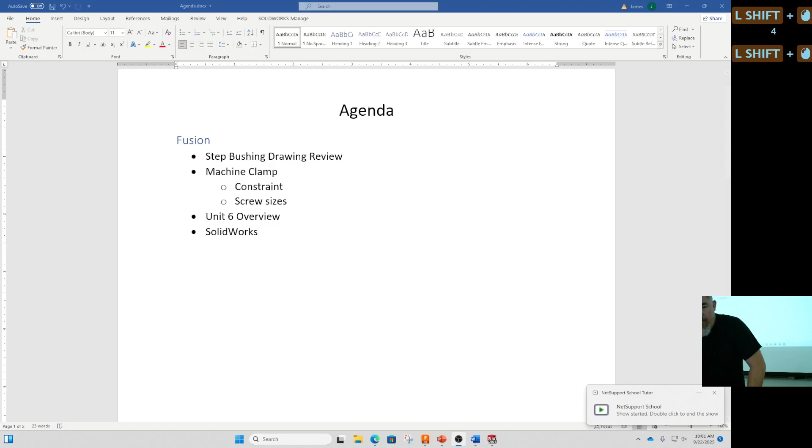Recording. All right. So here are the drawings that people did for the step bushings. And so when we're looking at these, there's two main kind of things we want to look at. One is the drawing views. What views did they use? How are they arranged? And that kind of thing.

And then also we want to look at dimensions, right? Which dimensions were picked, but also what other thing for dimensions? We want to pay attention to which ones we use, but also what? Not number constraint. Yeah, but where we put them, right? Do we pick the right dimensions? Do we put them on the right views?

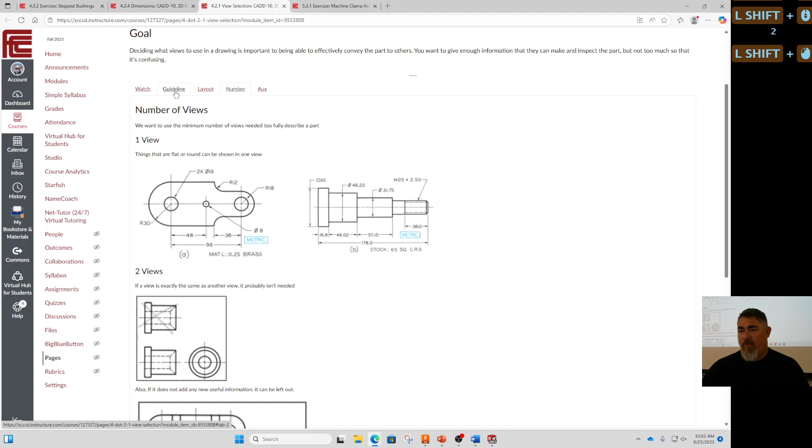And so just to do a quick review of that, here's the part that it gave us. And so in view selection, we've got some guidelines: the drawings themselves are for inspection of the part. We want to have as few views as possible. We want to see holes where they're round, and we want to use an appropriate scale, and we want clarity for the drawing. So we want some white space to kind of separate things so that way it's easy to see what things are, right?

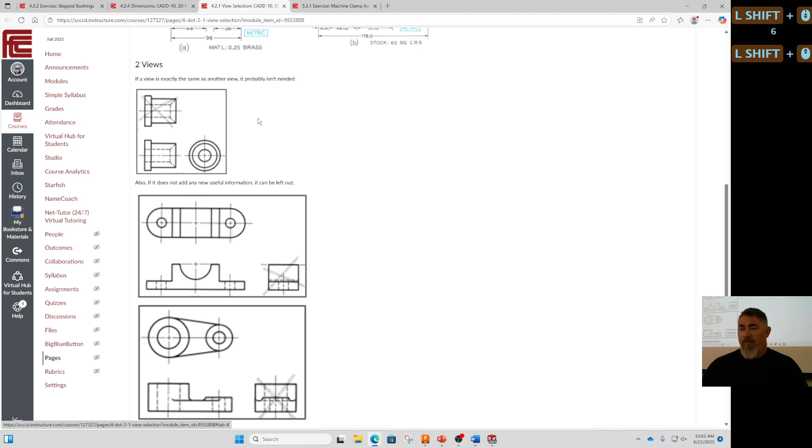So I'm not going to go through all this, but based on the number of views, for cylindrical things, if it's got a cylindrical thing with a hole in it, usually 2 views is good for that, right? And then, so let's just look at views first on these. What do you see? First, is all the geometry correct? No. Right, this one? That's not the shape of the part, right?

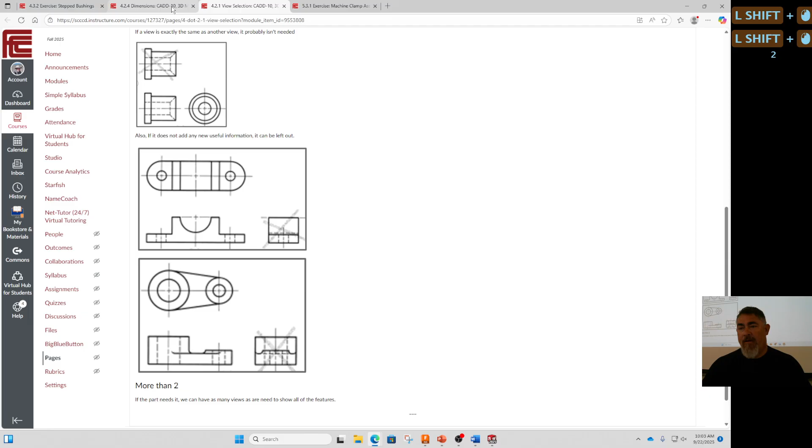And so that's one of the problems we encounter sometimes if we have a drawing that doesn't have dimensions correctly. Because if you don't look at the parts, you just look at that drawing, it looks like it's flat, right? What should it have on it to tell you that the part is round? Diameter symbols. That would tell you this thing is round. So even though we had pictures of the part down here, because they didn't have the diameter symbols, it's easy to overlook something like that. You might think, oh, that's obvious, but really, it means a lot, right?

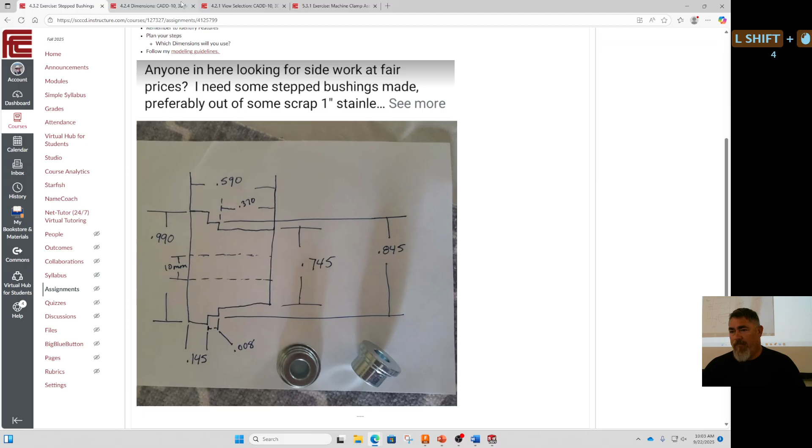So that's why we want to make sure that even when we have our drawing, we don't overlook doing simple things like that. So I'm going to take that one out of here. Even though this view is pretty good, we're just going to take that out. So what do you think about these other ones? What about paper size for this part? One is too crunched up.

So yeah, we have a few that did A size title blocks and some that did B size title blocks, right? Is there a big difference in the use of the paper on those? Because you have more clarity. Like, the more clarity, the more dimensions pop out. And so some of them, like this one, there's a lot of white space, but it's kind of crowded.

But let's say between this one and this one, this is a B size, that's an A size. The views themselves, now that I've scaled them down to the same size, they're about the same size and about the same use of the paper, right? So it doesn't matter which one we use at this point for this.

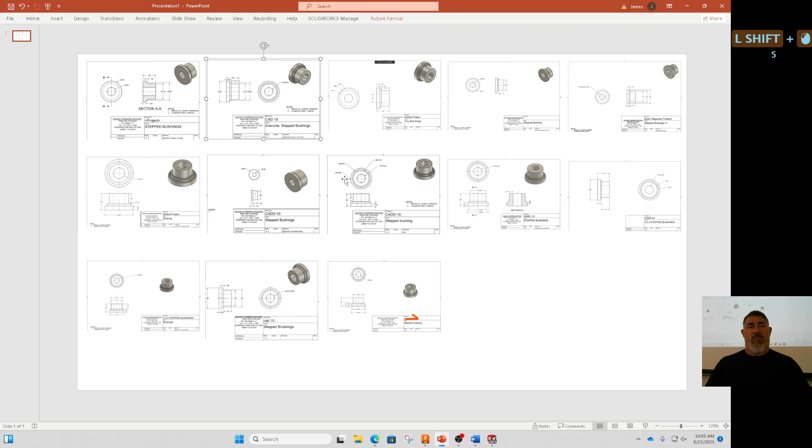So there's some A's that are a little bit more crowded, some that are a little less, and there's some B's that there's a lot more white space, and then some that the paper is kind of used differently. So is there a big difference on this part from an A to a B size? Not really. And so either one would be okay. Kind of depends on where you're working, what they like to do.

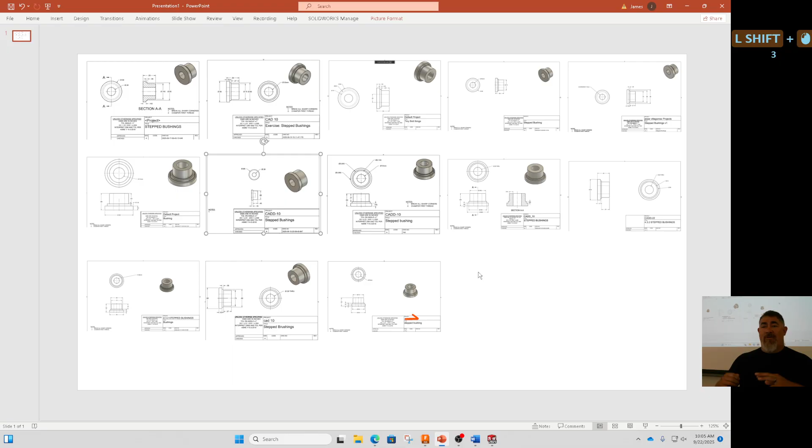Some places say, yeah, make it on the smallest piece of paper. Some places, no, we're only using B's, but we'll print them out on an A-size sheet so it's more portable, but it's still readable. So I just did that for the welding department on some drawings for them. What does change though when we're going from an A to a B size? What's a big difference on the sheet? What do you mean? Yeah, so the divisions are a little bit different.

But let's see, just look at these two. Right now I've kind of scaled them to the same size. What's a big difference between these two drawings? Just without the views, just what? Yeah, the size of the title block. On an A size, the title block takes up almost a third of the page, right? On a B size, it takes up a lot less proportionally.

Even though it's the same size when it's printed full size, proportionally it's smaller. So you have a little bit more real estate to work with for your views and things. And so that's kind of a thing to think about when you're picking paper size. So right now we're kind of going to leave that alone and look more at the content of the views. So got a few different layouts of views. Are there any that are laid out incorrectly?

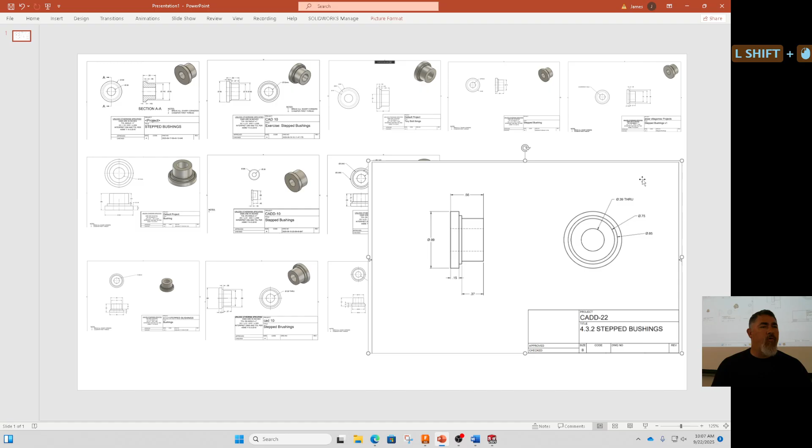This one? Oh, this one? Is that incorrect? So there's no isometric view. Is an isometric view a requirement? No, it's not. It's there for clarity, so it's usually a useful thing to have. Could this have been rearranged a little bit to add an isometric? Probably. That would help with clarity. But it's not wrong.

Oh, yeah, no title block information. We need those block tolerances. So, any other ones where the orientation or layout of the views is incorrect? Yeah, so this one right here, this is not the correct orientation for the views, right? If I came straight down from here, this would be turned 90 degrees.

And so we want to make sure that when we create that, we have our base view, we always project to get the other views. And we leave them on the side that they're projected onto. You don't make a new base view somewhere else on it. And this is also a problem that happens if you have one view and then you rotate the view, because it doesn't affect the other one.

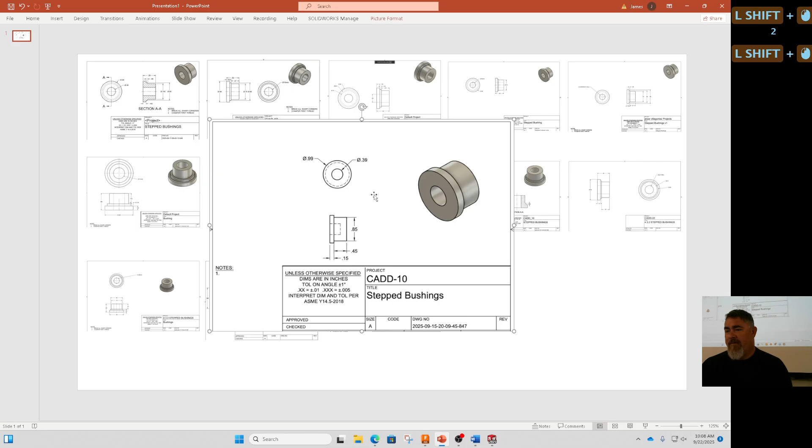And so that's why I changed the template this year to having just the base view. So we can fix that one how you want it and then create views from that. So we want to make sure that we keep things in the correct orientation when we're doing it. Any others that are incorrect? Upper left? This one?

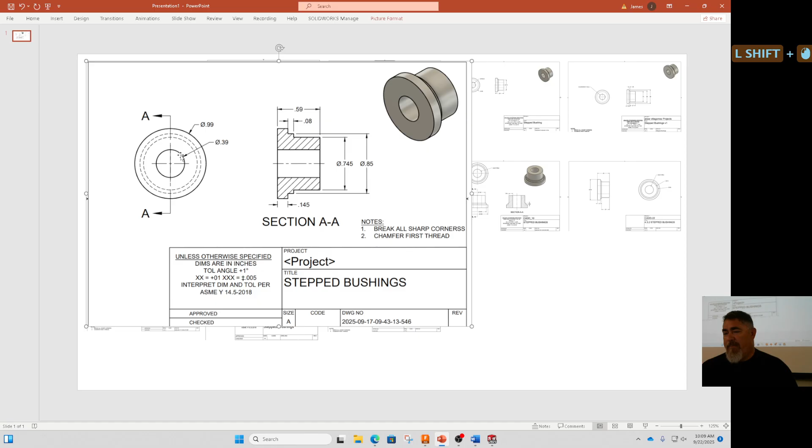No, because they've got it on the section, but the orientation is correct. Because looking at it from the side, those are hidden lines. So the orientation is correct. It'd be nicer if it was on the other side, right? It would be nicer if that view was on the other side, so there were visible lines instead. And so same thing with these here. It would have been nicer if the round view was on the other side. That would turn these two hidden lines into solid lines, right?

What? Yeah, they're all. So there's correct and there's more or less good, right? So all of these are laid out correctly, and so it's really a decision of what is better, what is more clear, what is more preferred. Which one's the question on? We're not going to ask that yet. So let's talk. Are there any that have extra views that we don't need?

Yeah, this one has basically the same views as this plus an extra one, right? Everything that's on this view could easily be on this view, right? And so that means this view isn't needed. So I'd probably take those, just like this one did, make this the section view.

But also, what about layout? So we have some that are laid out vertically and some that are laid out horizontally. Which ones fit the paper better? For this part, the horizontal layout fits better, right? If the part was real long and skinny, maybe having them vertically would be better. They'd use the paper a little bit better, and they wouldn't be kind of crammed into the corner of the title block, or having to reduce the size to make them fit. And so it's always a thing of which views are going to fit better.

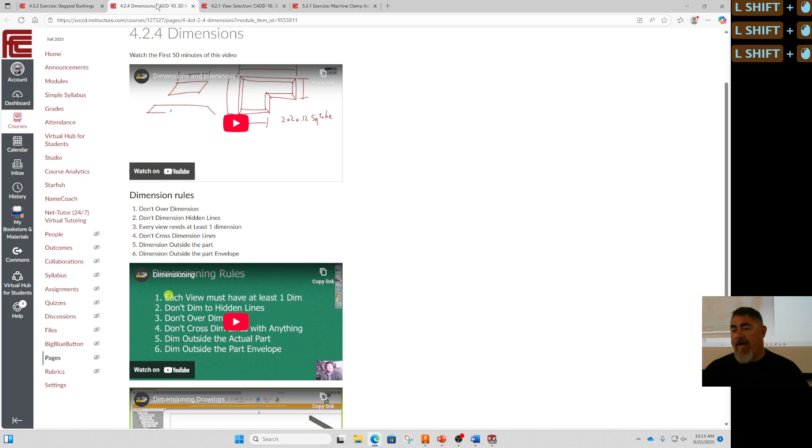So as a refresher, let's look at the dimensioning rules. So remember, I have my 6 dimensioning rules. Can you break any of these? Yeah, you can break the bottom 2. That's it. Those are the only 2 you're allowed to break. What's the part envelope? Yeah, if you just make it into a rectangle, that's the envelope.

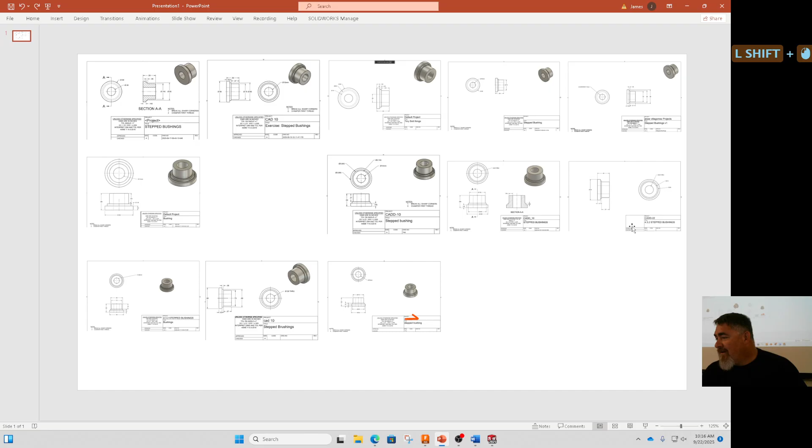And so let's go to these. So are there any that are dimensioned in the envelope? It's getting kind of close, isn't it? That's in the envelope. The 370. It's lined up with the edge of the part. Any other ones? No, everything else looks... Oh, this one. Right here. As well as this one. These are both in the envelope.

And you see that because it's there, it's looking smashed together, right? And that's why we want to stay outside the envelope. We want to keep things away from each other so they're not crossing over each other. Is this one breaking any other rules?

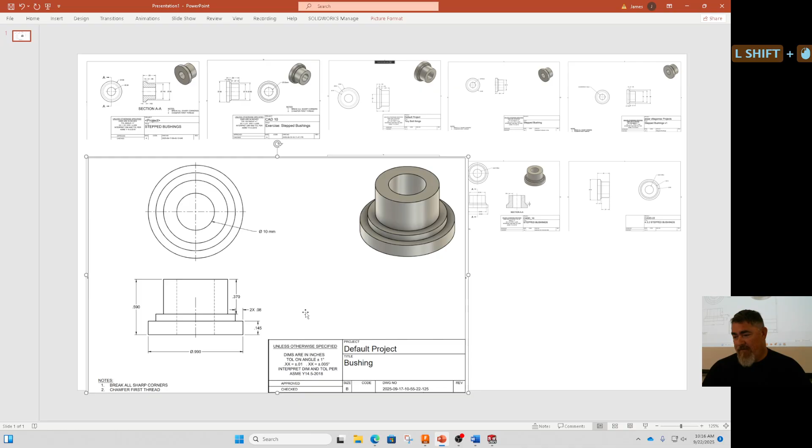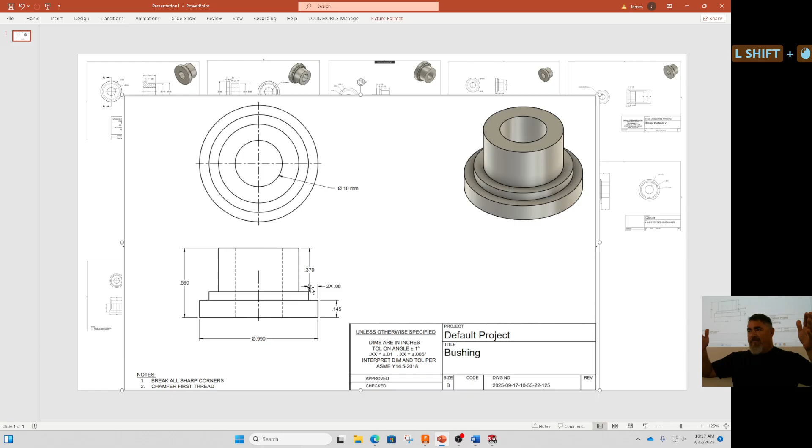Yeah, so it's crossing a dimension line, right? Don't cross dimension lines. If I look right here, the dimension line for this goes right here, right? And this one is going right through that. So even though there's no actual line there, it's going through where the line would be, right? And so that's breaking that rule. Okay? So the rules are there to make sure things are spaced out and it's easier to see what's going on.

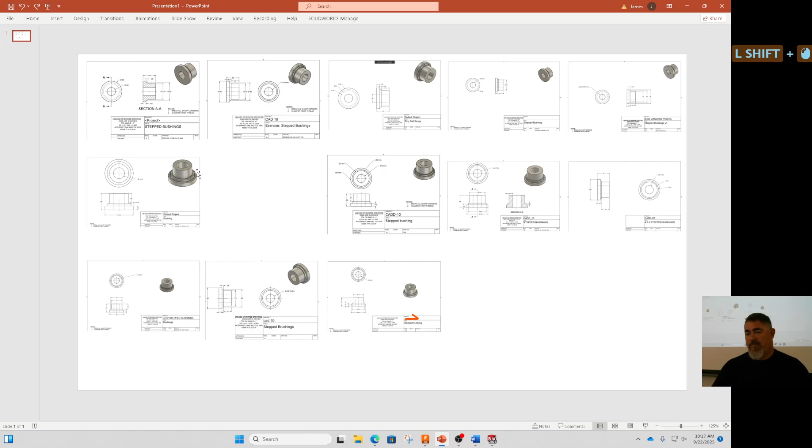What about the circles? Let's talk about the circles. Where should the cylinders be dimensioned? Yeah, on the side view. So where they're seen rectangular, right? So on this view where we see it rectangular, we want those dimensions to be there. The holes get dimensioned where they're round. Anything wrong with these? No diameter symbols. Anything else?

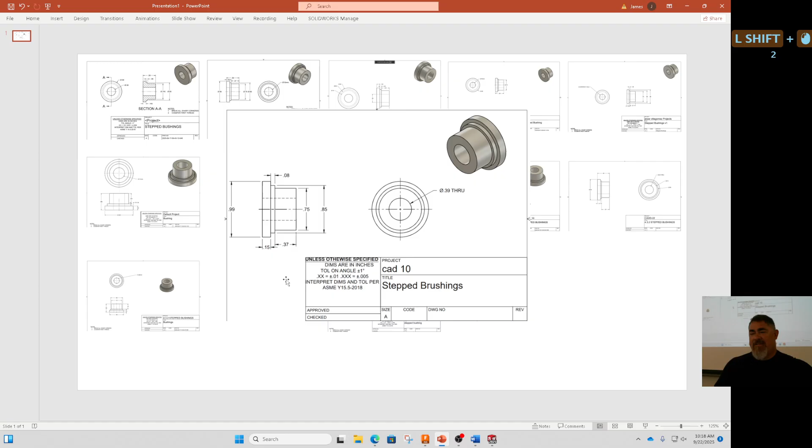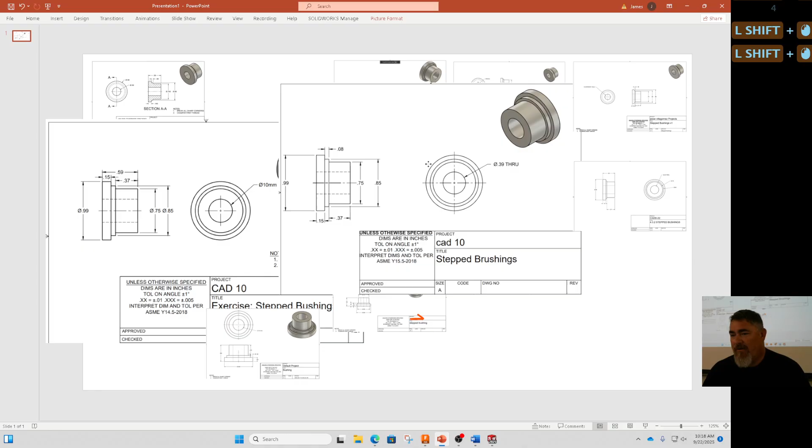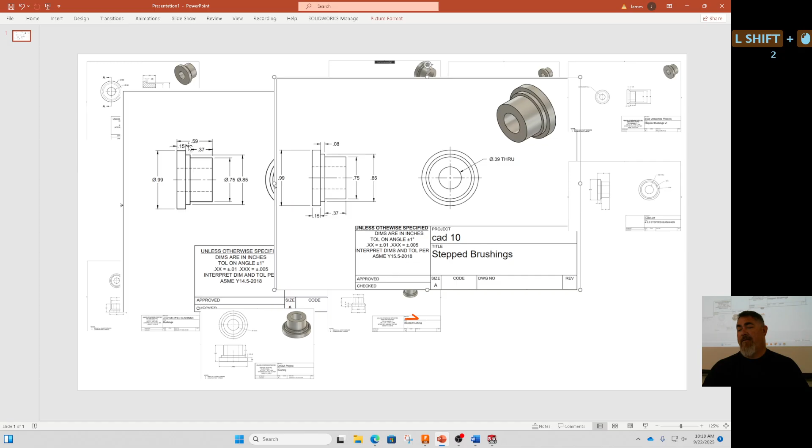They're kind of even spacing, right? This way looks pretty good, mostly, except for this top piece, where it's just running into each other. But up here, it's kind of smashed again, right? Same thing down here, it's kind of smashed. So we want to be able to have some equal spacing and space things out from each other. Which one looks the best with spacing?

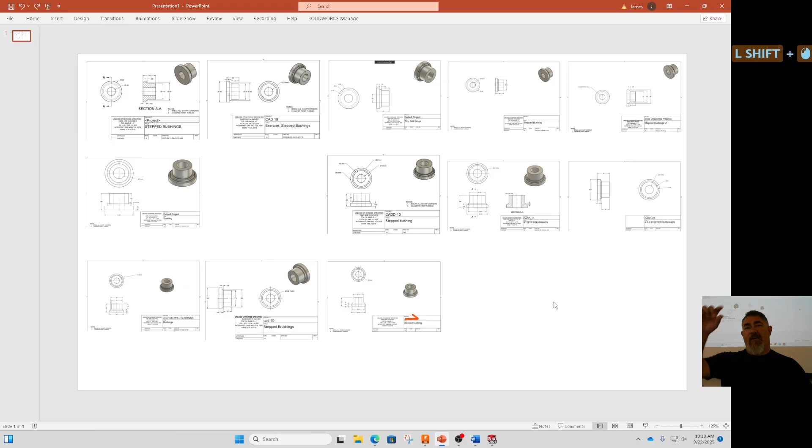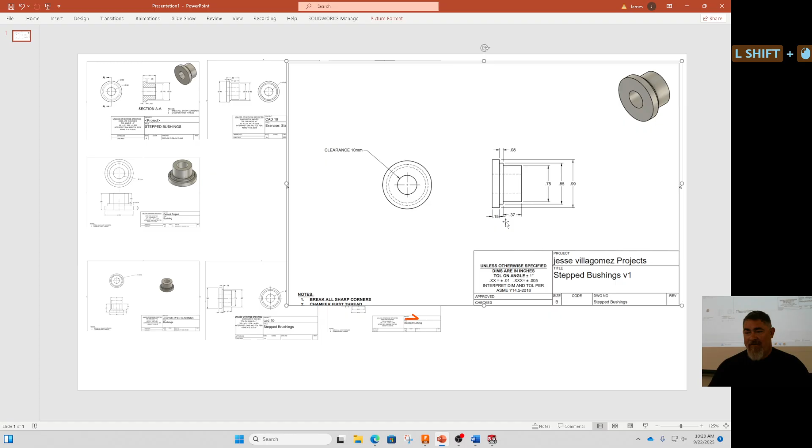I know you can't read the dimensions, but look at where the lines are. I made it small on purpose. Top right. This one? Look at that. What about that? So there's some good spacing here. Of course, I'm missing diameter symbols still. But here we're still smashed together down here, right? And that happened a lot; I think everybody just kind of smashed things together. You've got all this space and just smash them in there.

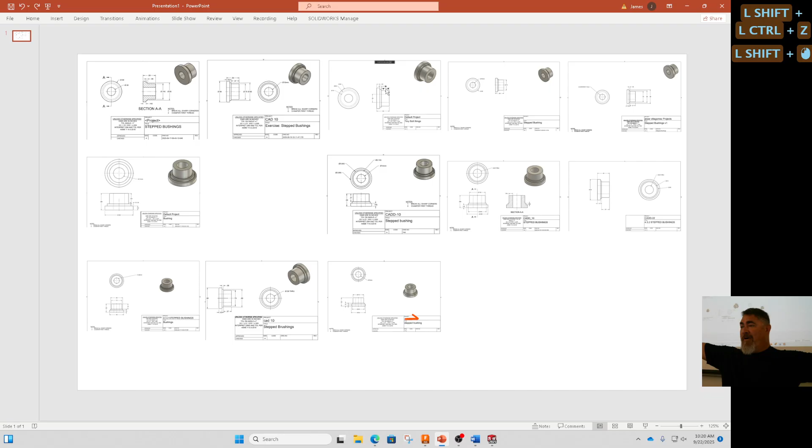No, because we want to be outside the part envelope. So, like this one really kind of brings it up a little bit here. But this one should be where? On the right side over here. Same thing. If we look at this space and the space to the first dimension, it should be the same or about the same. So we should go out from the part about the same distance to get to that first dimension on all sides. And then keep that spacing.

What is that space supposed to be? From the part to the first dimension. It's 3/8 to 1/2 inch after it's printed. And between dimensions should be about 3/8 to 1/2 inch. Is there anything in Fusion to help you know where that is? Aren't there little snaps that happen when you're dragging your dimensions? Yeah.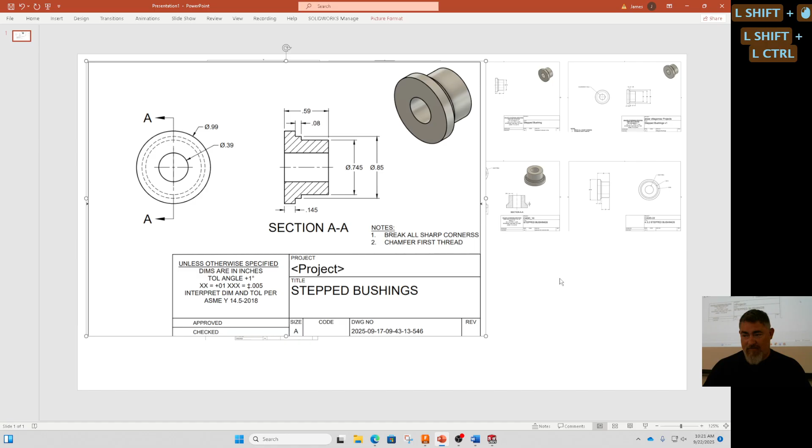So like here, it snapped to 3/8 from that point. But if you bring it out a little bit more, there'll be another snap here. So set to your first snap and then stay on the snaps after that, and that'll keep things even. And I'm not measuring them, so as long as it looks good, that's what matters. In AutoCAD, yeah, we can make it exactly a certain distance away. Or draw by hand, we can make it exactly. In the solid modeling programs, Fusion, Inventor, SolidWorks, we can't tell it to be exactly a thing. We can go by the snaps, though, so that way it stays even.

And so that's something to think about. On this one, though, somebody put their name under the project instead of the name field. So make sure you guys do that part correctly. What about any other thoughts on dimensions? Anyone that broke any of my dimensioning rules? So anyone break any of these rules? Are there any views that don't have any dimensions? No? That's good. Anyone dimension hidden lines?

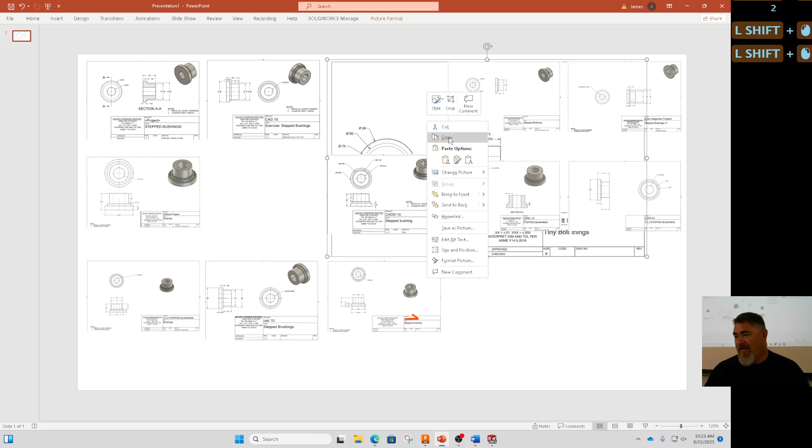Yep, right here, right? And over dimensioned, because they put the dimension there. Oh no, they didn't do it there. So actually, this one's not over dimensioned. Just these ones should be over there, but they dimensioned the hidden line. Any other ones? I thought there was another one. Anyone over dimension? Oh, here. Remember, out of those 4 dimensions, we only need 3. So, which 3 should you use?

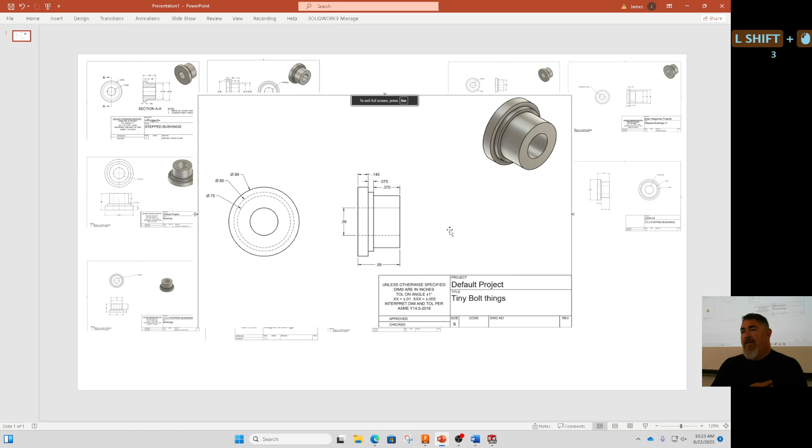Overall would be critical. How do you know what's important? So when you're just given a part like this, you don't know what's important, right? That's why with book assignments, you just go by whatever it tells you usually. Now this one where it told you too much, you're gonna have to guess. So usually we want to keep the overall, and then we just take out one of these based on what's important. Is it more important how much sticks up here, how tall this is, or how much still remains here? We don't know because we don't know what this part is for, but you're just gonna have to guess.

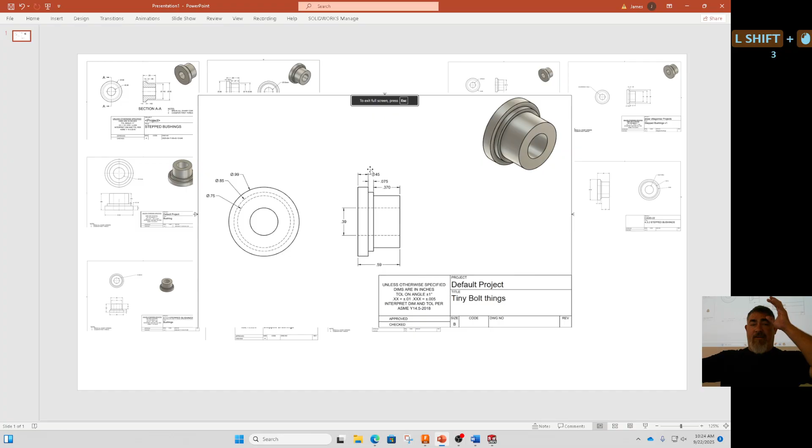It'd probably be this and this, or this and this. I don't think it would be the .370 and the .145. I don't think those would be two of the critical things. Either how much sticks out inside of the hole can vary, or how much sticks up above can vary. But that 0.075 is probably the thing they care about. So I would keep that one and then take off either one of these. It also could be that all 3 of these are important, and this is just to let the machinist know what the overall is.

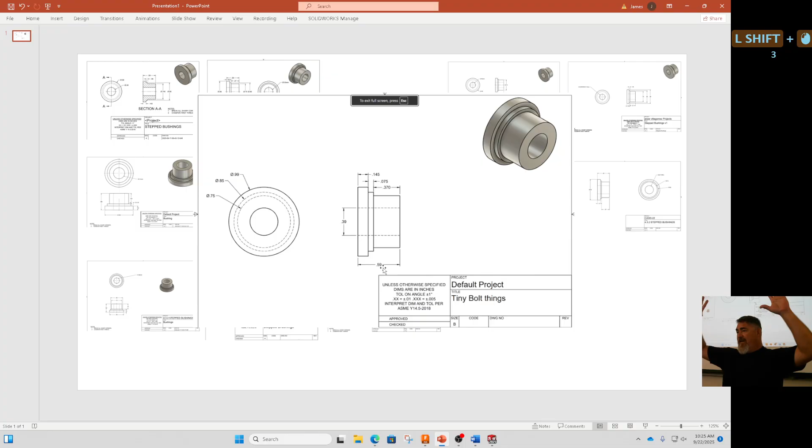So is there a way we can still keep this one but not have it be an inspected dimension? Put it in parentheses. Yep. So we can put it in parentheses and say, this is for reference. I care about these numbers. You have to hit these numbers to the tolerances. And just so you know how long this part is, so you don't have to do the math, this is what it is. So if you put it in parentheses, you say, this is not the one to inspect. Inspect the other 3. But you let the machinist know, make sure you cut your stock longer than this. Okay? Any other questions on these?

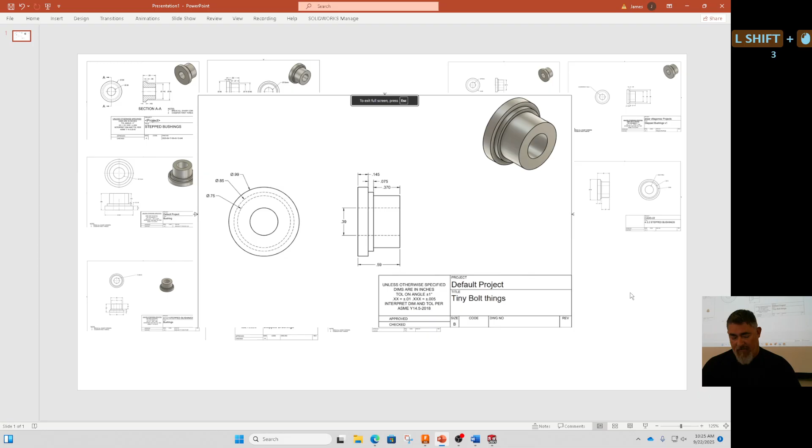Yes, no, no? On the third one. Third one to the left, which one? Last one at the very... This one? Yeah. Machine one. Okay, I'll ask the question. What do you guys think? Any problems with this one?

No, it's not overdimensioned. It does need diameter symbols right here, though, right? What about the size? That's fine. Some layout, you know, it's not too bad. This one is way off to the side, though. Look how far that is away, and then look how far that one is. And where should the diameter symbol be? To the left, right? Before the number, not after.

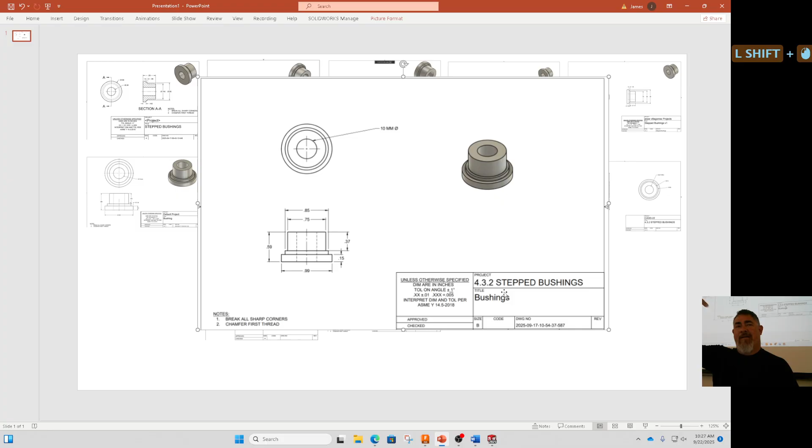And if we're dimensioning a hole or an arc, where should the leader arrow point? Center. At the center. Is this pointing at the center? No. So that should be pointing at it here. If it's connected there, it needs to go here. If the dimension is over here, it needs to connect lower. And that's the one thing I don't like about Fusion: if you use the hole note, it adds a leader that doesn't automatically point to the middle. And so you just have to manually adjust it.

Or use a regular dimension, and then it'll always point at the center. And you can just add in whatever text you need. So just don't use the hole note. Use the hole note mainly if it's threads or if it's a counterbore or countersink when you need that extra note. If it's just a straight hole, just use a regular diameter dimension.

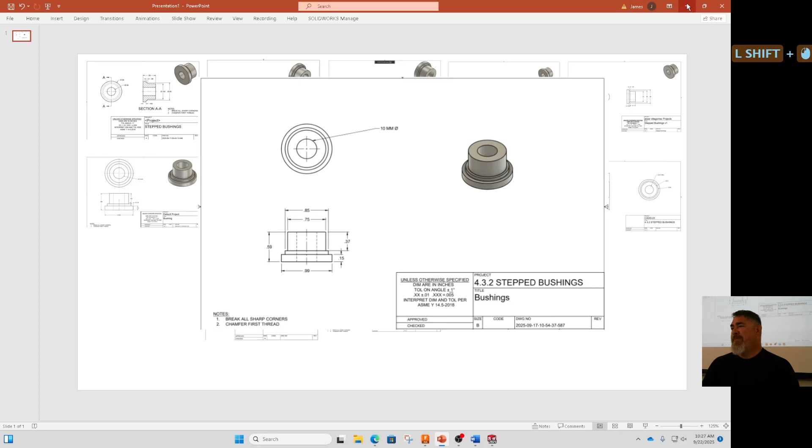All right, you ready to see mine? That's how I would do it. And actually, you see, I chose not to do the step. I forgot how I did it. But look at right here. Instead of being this, which makes it hard to read, offset it a little bit. Now it makes it easy to read. It doesn't just run on into one big thing of text.

But the spacing from the part to the first dimension is equal all the way around. And then, even though it's not the exact same spacing there and there, because of the text, it looks the same. It looks balanced.

How come your circle's allowed to... your leader? Oh, I thought you meant that it physically had to be in contact with the center. No, it needs to be pointed towards the center. It's pointed towards the center. And because I use the regular dimension, no matter where I move it, it's going to be pointed. If I use the hole command, now it's not.

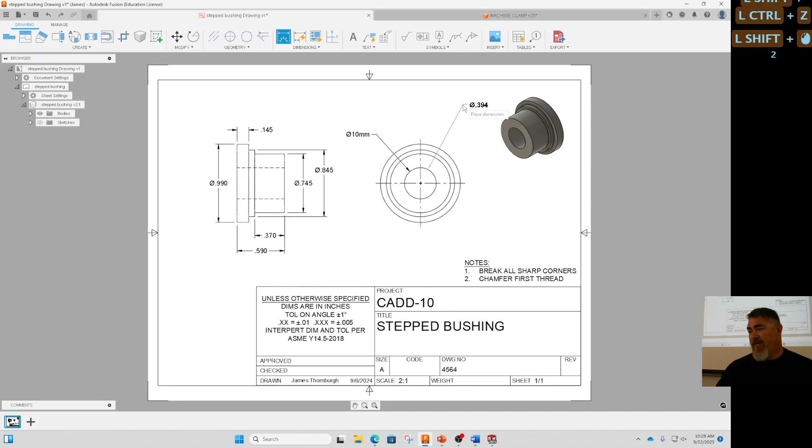But I could easily grab it and drag it till it's centered, or if it's up here, grab this point and drag it until it's pointed at the center. But by using the regular dimension, it's automatically going to point no matter where. Okay, so that's how I would do it. Because it went to the A size, there's not space for the notes down here, so I stick it here.

So nothing matches, like sharp. For the thread, right? It's right there. Yeah, but I mean, on the assignment. Yeah, these are general notes for everything. Oh, okay. So every single part, you always break corners, and that just means when it's cut, it's going to have a sharp 90-degree corner, and if you pick it up, you're going to slice your hand. So a standard practice is deburring, where they use basically a scraping tool and scrape the edges real quick, just to knock off the corner so you don't get cut picking the parts up.

A lot of times it's done by hand. More often now, especially with 5-axis CNCs, they'll just do a quick little chamfer, like 0.05 inches around all the edges of the part. So it's clean when it comes out of the machine. But that's a thing on everything. And threads, this part doesn't have any threads, but it doesn't hurt to leave the note. Sometimes it'll be here, sometimes in the title block. I just decided to have it as a separate note.

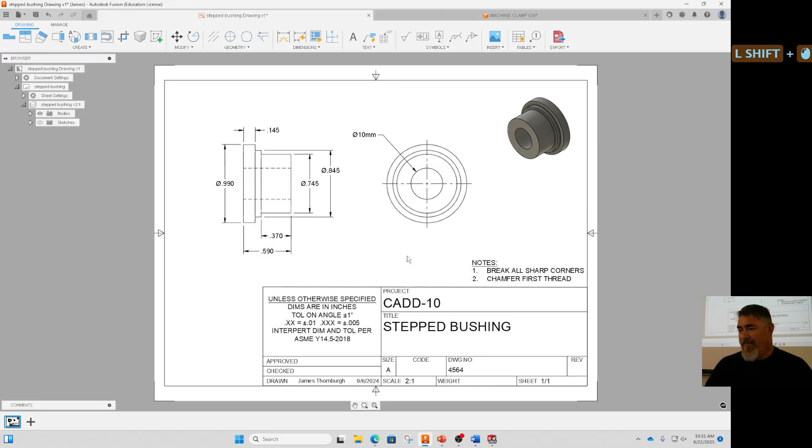And this is also where, if you have mirrored components, like on the clamp, left side shown, right side mirror image. If you look back to the sample drawings, those have that note a lot of times. I don't want to draw both the left and the right side version. During the machine assembly, you would put in notes, this is right side. On the part file? Yep. So, any questions on anything I did there? Why I did it? All right.